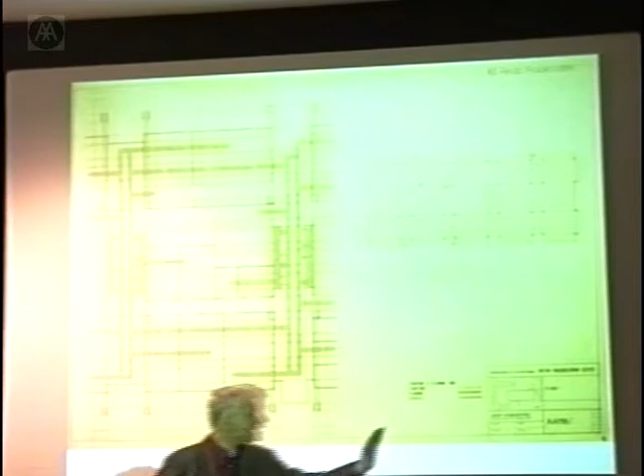And so the next building, which I haven't got any nice pictures of, was also by Arup Associates, was called the New Museums site in Cambridge. And I don't know if I can just point out slightly how it goes. It was on a grid that repeated like that. Arup Associates tended to build buildings on the grid. And so it's rather old, you see this. And so this and that is 2 grids. And then the slab spans this way about 8 or 9 metres and was made as a kind of series of T-shaped beams, so that you could get pipes across there. And this is where the laboratories were going to be.

And then there was a zone here which could contain staircases, but more importantly, it contained a duct like that, which was about 5 metres by 1 metre. And that was big enough to say all possible services can go in that duct, so we can allocate spaces and draw them as though they were there, and then simply have a schedule to say whether that particular service is there or not. And the building is, I haven't got a picture of it, and it's pretty boring, but that kind of step forward in accommodating the services seemed to me quite important.

And then there's a diagram here which shows that also in this zone you could get horizontal services running in this direction because it was a circulating space for people and they don't need much height. A couple of metres will do. And so that makes that provision. And that's a kind of history about how you get pipes into buildings.

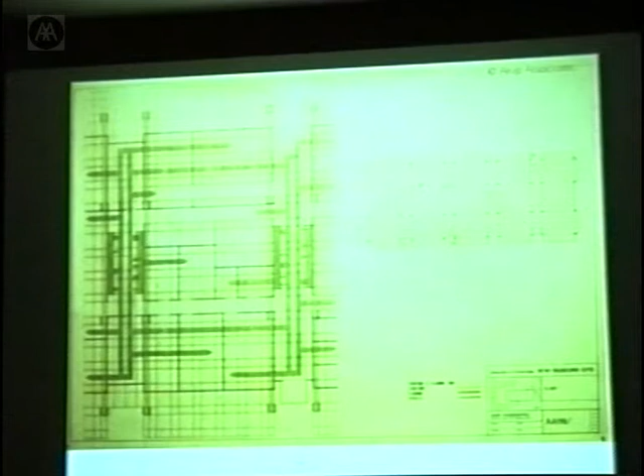There was a lot of talk at the time about tartan grids, so that you have here a pair of grids, and then a big grid, and another pair, and a big grid, and so on. And in fact, Leslie Martin did the same thing for a building in Oxford, which was some biology laboratory, which also had a tartan grid. But his idea about the tartan grid was that not just that you got pipes in it, but you got lavatories and staircases and all sorts of rubbish of that kind. So that, I think, probably deals with pipes.

Now, then I'm taking it for granted that I don't need to peddle the sustainability argument. Everybody here understands that if we go on burning all the carbon there is, the atmosphere will get poisonous. So we better not do it. And then we were all reminded of that in 1973-74, and I was asked to work on a university in Doha. Well, Doha is quite a hot place on the Arabian Gulf, like 46 centigrade is the sort of temperature you expect to get. And some people wanted to design this university so that it didn't need air conditioning. And that seemed like quite a tall order.

But there was a precedent for it, which was buildings like this, which are called towers of winds buildings. So that this is a section through a part of the building, and it's got a tower here, and air can come in down here and ventilate this space and go up again. What you can't quite see in plan is that plan there. This is where the tower is built, and there's a crossed shape division, which is what these walls represent in the middle, to subdivide the airflow. This is definitely a valid precedent, and I believed so at the time.

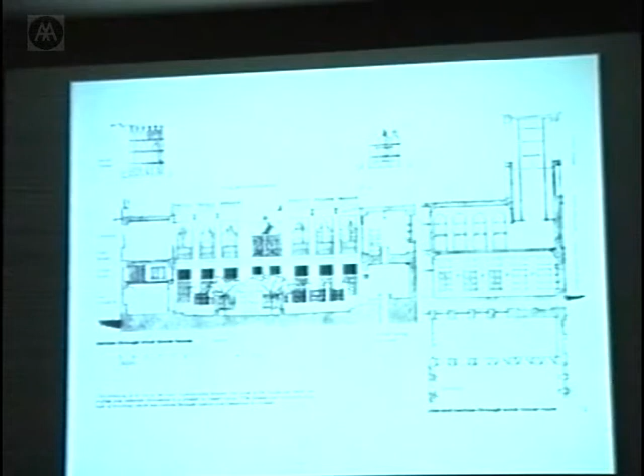And so that's a drawing of the vernacular building. Now, this is a notional experiment to explain why the shaft needs to be subdivided. And it also, I think, makes it quite important to look at the precedents, because in a way, nobody would believe that you needed to subdivide that shaft. But I've never done this.

Apparently, if you cut the bottom off a bottle and then put a candle in it in a pool of water so that air can't get in at the bottom, and you try and light it, it will go out. And the reason it goes out is because the air cannot move up the neck of the bottle and down and get any air in. If you subdivide it with a card or something down there, then the air will flow. And that explains why the Tower of Wind buildings need to have a vertical subdivision.

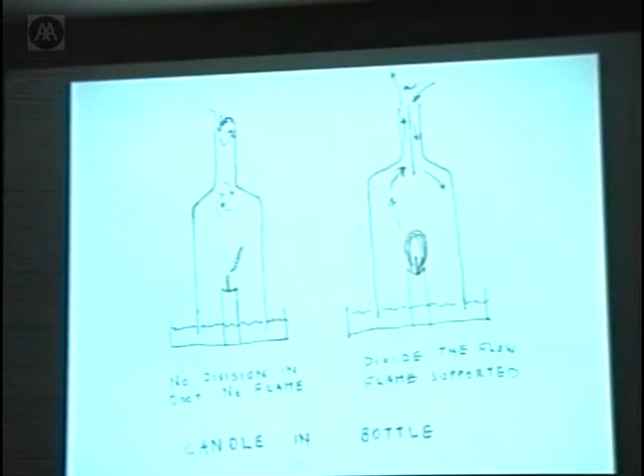And that is a piece of fluid mechanics which, it would be quite fun to set this experiment up on CFD and see what the CFD predicted, because the experimental results are quite clear and the CFD is another story. So there is a diagram which explains the idea about the ventilation of the Tower of Wind buildings.

And then I started working on this building in Doha, and I thought, okay, well, we're going to cool the building down at night, and it mustn't get too hot during the day. So then it must have enough thermal capacity so that whatever heat gets into it during the day mustn't overheat it. And so you say, okay, well, what heat is coming into it during the day?

Well, there are some people in there who are going to give off heat. It's a lecture theatre, so they're not going to have computers or anything like that. And the next thing is light. So the question is, how much light do they really need?

Well, now, there was a traditional building in Doha which is constructed of mud and reeds. So you look at a building, here it is, it's a single-story building, and it's got a sort of spandrel here which is built up off the ground. It's then got these walls supported on these mud columns, and there is this sort of shape here which filters the light coming in. So light is reflected off the ground, comes up under this ledge, and is reflected several times and hits the floor.

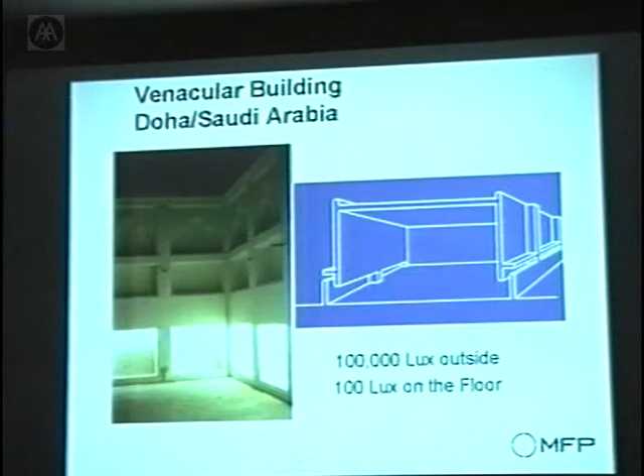But then when you go to the Cob Cottage, you've got the walls about a metre thick. The windows, of course, are much bigger, because you don't have 100,000 lux bright sunlight very often in Northern Europe. It's usually about 5,000 lux for an overcast sky. And so the windows are bigger, and I guess the light level in there is not 100 lux, but nearer 50. But it's pretty amazing that these two sets of buildings, which have been, I don't know whether you can say designed quite, but they have evolved in step with a culture.

And the people have made choices which go, if the windows are too big, then the temperature is too extreme. And if the windows are too small, you can't see. So we better find and optimize that a bit. And they optimize it and come across something which I think we have to say is about the same.

And then you look at the code of practice for educational buildings in Britain in 1947, or 48 or thereabouts, which says all buildings have to have a 2% daylight factor. Well, 2% daylight factor on an overcast day is about 100 lux. It is 100 lux. So there's another pointer at the way in which society evolves solutions.

And I think one can go on with this and look at 17th century buildings in Britain, or do I mean 18th century, my history is a bit poor, where the nouveau riche British traders, slave traders probably, got Italian craftsmen to come and build themselves some rather nice houses around the countryside in Britain. And they built quite tall rooms, rather like this one, with the windows going right up to the head of the window. Now, the explanation of that, I don't know what you think it is.

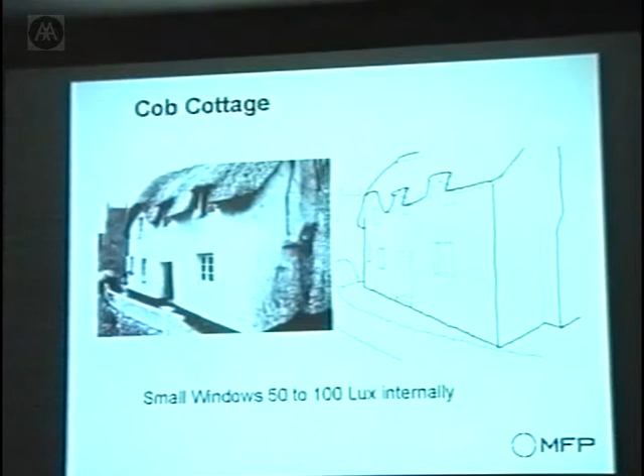Well, there's a building in Mysore, which is an 8-meter double cube with a clerestory all the way around it, with 4-meter square windows on all 4 faces. So it's 16 meters by 8 meters on plan, 8 meters high, and it's got windows with the head of the window 8 meters above the floor. The lighting inside that is absolutely wonderful, and you certainly don't need to turn any electric lights on. If you want to have low story height buildings, and you want them properly lit, then you better light them through the roofs.

I've jumped ahead. Right. So now, having got to a Cob Cottage, we then go on through the history and come to a weaver's cottage, where people were forced by economic pressures to have looms at home. And if you're going to work on a loom, you need a lot of light on the loom, so these buildings had very big windows on the first floor and are called weavers' cottages. And you can probably get 1,000 lux on an overcast day with a loom a metre away from the window. So that's a pointer towards getting high light levels for fine work.

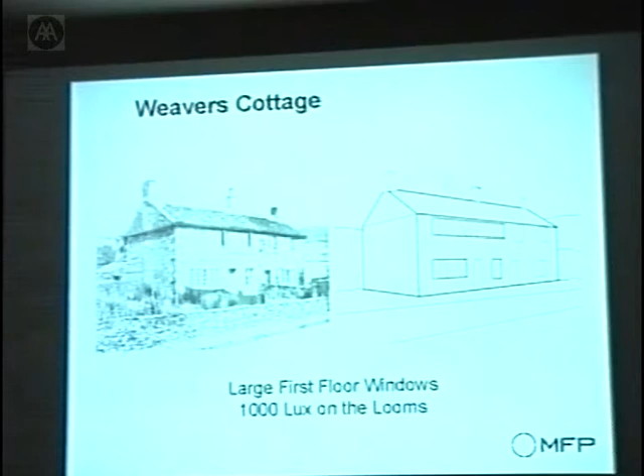Slightly difficult, I think, because if you go back to the Arabian hut with perhaps 100 lux on the floor and say, I wonder whether people made Persian carpets in these huts, I think we'd better hope the answer is no, and they made them in tents where perhaps it was brighter. So that's all about lighting, and got me to the conclusion that for Doha we would design for 100 lux.

And then you say, oh, well, if you're a lighting engineer and you put some lights up in a building, you say, how much light do these lights produce? Some number or other. Then you say, how much of that light gets onto the working plane and is useful? Well, the answer is something like a third or a half, which means if you want to light a space to 100 lux, you'd better provide 300 lumens per square metre one way or another, and that's 3 watts per square metre of heat gain, because light is about 100 lumens per watt. And that's a figure which I think we should all know and remember.

Just as 100,000 lux is bright sunlight and is 1,000 watts a square metre, a 5,000 lux sky is 50 watts a square metre, and the bright blue part of the sky is about 10,000 lux and is 100 watts per square metre. And those are quite useful numbers. So then here we are trying to design a university in Doha, and we're saying, let's have 100 lux inside.

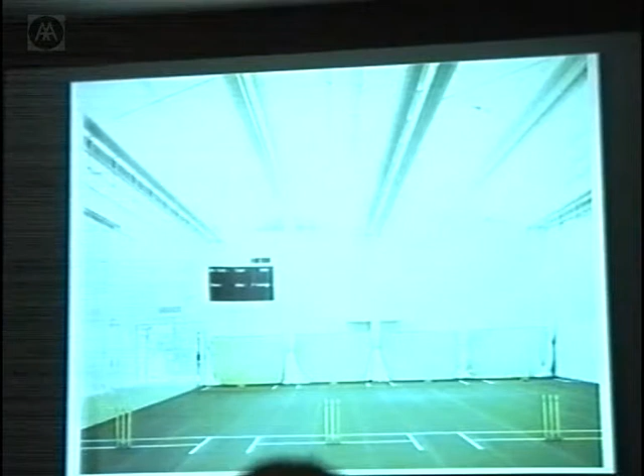So that more or less finished Doha, and it looked like that, and it's the biggest air conditioning load in Arabia, despite all of this rather pretentious justification. So now let's get going, because that introduced some of the ideas about light.

Now, I then went and did a competition with David Morley for a cricket school, the MCC Cricket School in Lords, an indoor building. And it was to replace the indoor cricket school which is there, which is a portal frame, corrugated iron box with a whole lot of lights inside it.

And the lights have to be on all the time because, after all, electric light's more reliable than natural light. And we thought, well, how are we going to get 1,000 lux on the floor in this building? And so one of the ideas was to have simply a black box. Well, that was definitely why we didn't want a black box.

So the next one was, what about a translucent skin? And of course, we knew that the competitors were likely to be in the translucent skin business because we knew who some of them were. And we thought, well, the problem about that is that someone else is going to do it. That's the main problem. So what justifications have we got for discarding it?

Well, the answer is that if you make this translucent skin able to give 1,000 lux inside on a 5,000 lux sky, it's got to have a 20% light transmission. That's perfectly straightforward and easy. But then when you've got 100,000 lux, you've got 20,000 lux inside. And that's definitely a bad thing, isn't it? And people certainly can play cricket outside.

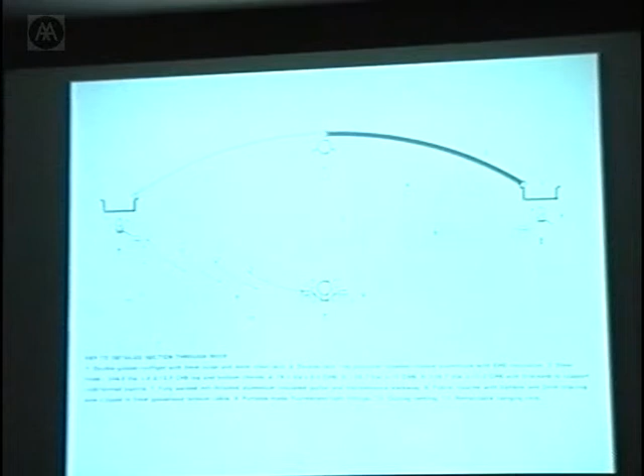Right, and you've seen a picture of the building at the beginning. So now there's some theory, because that's introduced the thing about how do you get enough light into a building. And of course 1,000 lux is quite bright. On the whole, nobody tries to design a naturally lit building to provide 1,000 lux.

And the cricket school is not heated, so it doesn't matter that there's rather a lot of glass there, losing heat. And it has very big openings so that the heat gain from the light is dissipated during the summer. And anyway, the light only gets in from the sun late in the evening and early in the morning,

because what you have to remember is at midsummer's day, the sun rises in the northeast and sets in the northwest, and you can get very badly unstuck, like the Tate Gallery at St Ives, if you forget that, which I did.

So now, there's then some theory about buildings. This is an adaptation that I've made of a thing called the LT method for designing sustainable buildings. Now, the idea of the LT method is that passive buildings are daylit buildings. Now, if you read all the literature about the LT method, it doesn't really say that unless you read it quite carefully, but it means that.

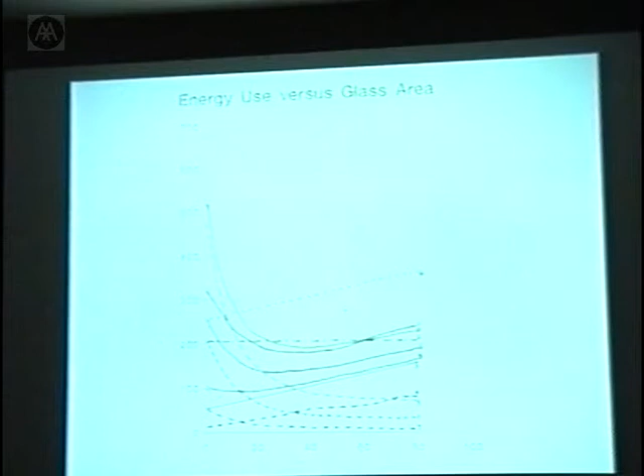So this is a thing called the LT method, and certainly when I first read it, it felt like a revelation. And I don't think many people have had that revelation, and so I put it to you that you should read it. Now, so that's enough about light now.

This is a building which was designed by Brian Ford and Alan Short and Tony Peake, and it's a brewery in Malta. Now, Brian Ford, for some curious reason, came and worked in our office for quite a long time, and we made him detail pipes in a plastic moulding factory, which I think he hated. But on the other hand, there was a bit of talk, and he went away and designed this Maltese brewery, and this shows a section through it.

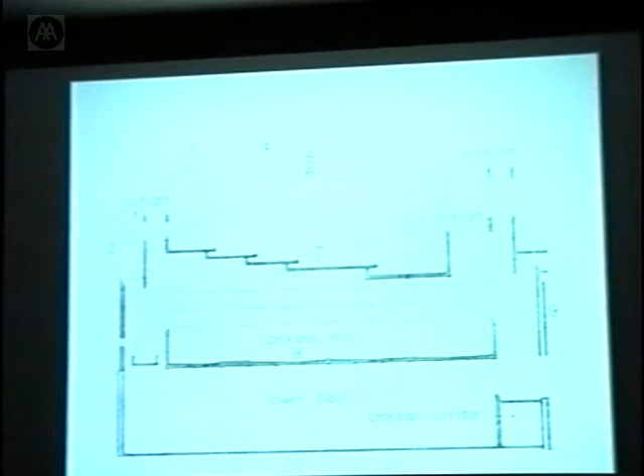You can see basically that there are some rooms. It's got double walls at the perimeter, various roof lights and ventilation openings. And the fact is that the inside temperature is about the mean of the outside temperature, which in Malta is quite comfortable. And it looks like that, which I think is a decent piece of modern architecture.

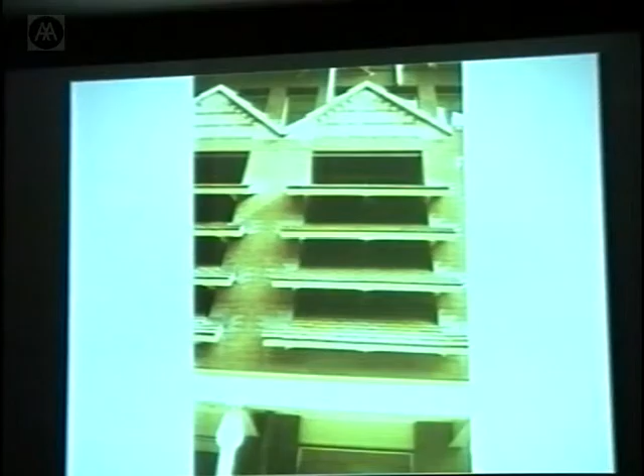Now, this is for a university where nobody talks about having air conditioning. In universities, you only have air conditioning if there are animals involved. So there's a picture of those shafts, and that's a picture of the air inlets. Working with Alan is pretty amazing because he draws very quickly and with fantastic facility. And maybe you think he sometimes draws a bit too easily.

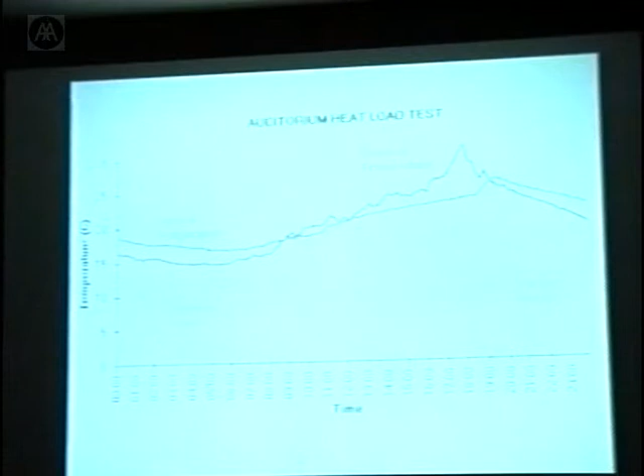And I think this peak is not the kind of thing which the design techniques predict very well. But on the whole, this sort of curve is perfectly in line with what the BRE discovered how to do in 1966. And it's in a digest which for some reason they've withdrawn from publication. So that is the Queen's Building.

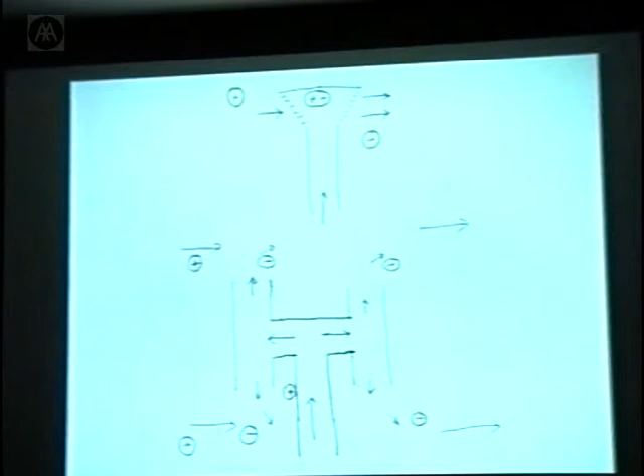Now, we were talking to Alan Short about the vents at the Queen's Building, those things. And when we were working on that, we decided it was very difficult to be sure you could keep the rain out. And so we put all these louvers in and thought that'll keep the rain out. And when you keep going, you look at it and you say, this is a diagram of what's going on. Air is coming up the shaft.

In general, the wind blows, so the wind is blowing across here. The wind blowing over something reduces the pressure, so you get a reduction of pressure because the wind's blowing over the top. But on the other hand, we put a lid on it here, and we're expecting the same velocity of airflow up here as we get coming horizontally in here, which means we're expecting more air to be going out through the leeward louver than we are expecting to come in here. And that means the pressure inside this enclosure will tend to build up. And that's not what you want.

You don't see chimneys like that very often. What you see is chimneys like this. Now this chimney, if you imagine that as all circular, the wind is coming in this direction. When it hits that chimney, it's arrested, so the pressure rises. But when it blows across these open ends, the pressure drops. And as long as there's a bit of clearance between here and here, then you still get a low pressure over this outlet at the bottom. So these chimneys seem to be much better.

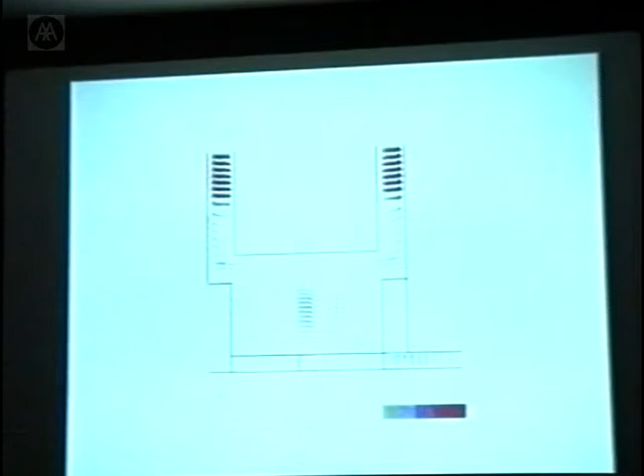Oh, look at that. Right. So now, let me just close this down. Not supposed to have done that. No. It's like that.

Technology transfer. There you are. Right. Look, there's your wonderful little thing. Great. Thanks, Max. Yeah.

While Patrick's setting up, thank you very much indeed, Max. At the end we'll have an opportunity to ask some questions and raise some points. I'm very pleased to introduce Patrick Bellew as well, founding partner of Atelier Ten, and he is going to talk about influences on an approach to environmental design, perfectly on cue. Mainly historical and animal influences, maybe some vegetable and mineral. And then he's going to talk about thermal storage techniques, talking a bit about the Earth Centre and also about the Federation Square project in Melbourne. So projects in the UK, Germany and Australia.

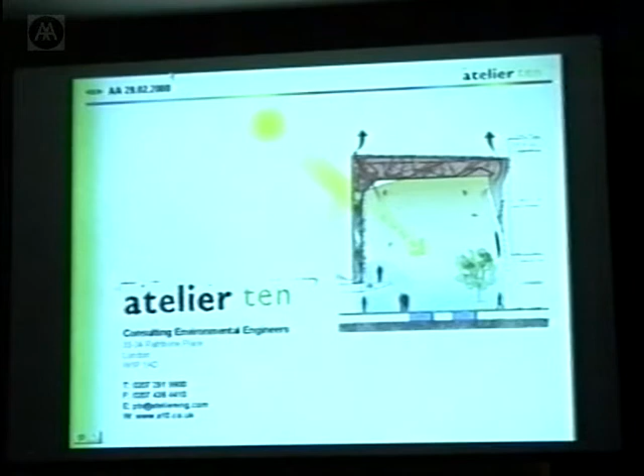You ready to go? I'm ready to go, miraculously. Thank you. Thank you. It's a very tough act to follow Max. I'm just going to try the... I wish I hadn't touched that now. Try and get both of them on at once. Just hang on a second. There we go.

I actually applied for a job at Max's practice once, and nearly went to work there. Just geographically didn't suit me at the time, and I've been a huge admirer of his work for many years. Our work has kind of veered away in slightly different directions in some ways, which I think I'm going to take you through this evening.

I came into environmental engineering quite by accident and entirely through the influence of a single individual who was Ted Happold. I put environmental engineering down as a kind of afterthought on my UCCA form in 5th place, beyond the various other courses around the country, very much not to do with engineering. And I went down to Bath, just thought it was a nice day out, get away from school and go down to Bath for the day to be told about environmental engineering.

And Ted produced a 2-hour lecture. He'd just finished doing the Beaubourg Centre in Paris, and he'd worked on the Sydney Opera House. And he produced a lecture that just stirred the soul to such a point that I came out of his lecture saying, that's what I want to do. And Max and I were talking before we came in tonight about what it is that makes people environmental engineers. And the answer is we don't really know. It seems people get into it more or less by accident, or frequently family or other connections.

It's not the kind of career you get into when you're filling in your UCCA form, that's for certain. And that's witnessed by the fact that many of the engineering schools around the country are closing down due to lack of interest. Single figure entry. One person joined the course at Reading this year, so they shut the course down. It's a very difficult area to recruit into. And so there are many architecture graduates coming out of university, all of whom want the support of good environmental engineers, but actually our system is not supplying environmental engineers anything like the numbers that we need to answer all of your needs in the future.

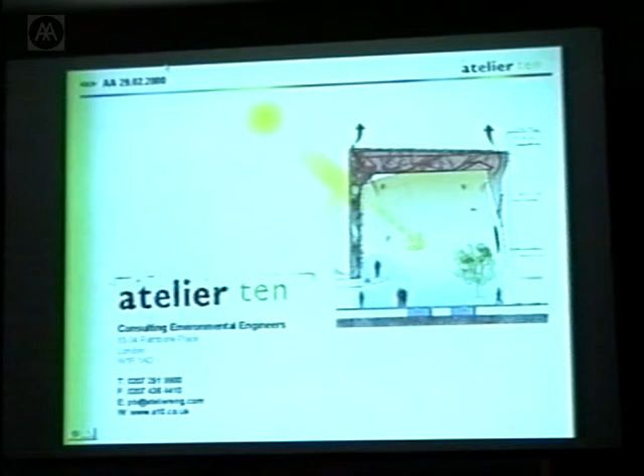Buildings consume 50% of the energy used on the planet, and you're responsible for designing those buildings. How are we going to achieve a 10% reduction in CO2 over the next few years unless our buildings make huge inroads into that? And it's not factor 2 or factor 3. It really is this thing about factor 4. You've got to be doing things a multiplier of times better to make your buildings have any impact on this kind of problem. You often feel in doing what we do, and I'm sure Max feels the same, like you're tilting at windmills.

Everything that we do is a tiny part of this huge problem, but it is nonetheless a vital part of it, and it's a part that architects have an enormous role to play. And I don't see myself as a kind of tree-hugging environmentalist in any way at all. I've never really been into that sort of movement, but what one is starting to realise is that there's an acceleration of change that is witnessed.

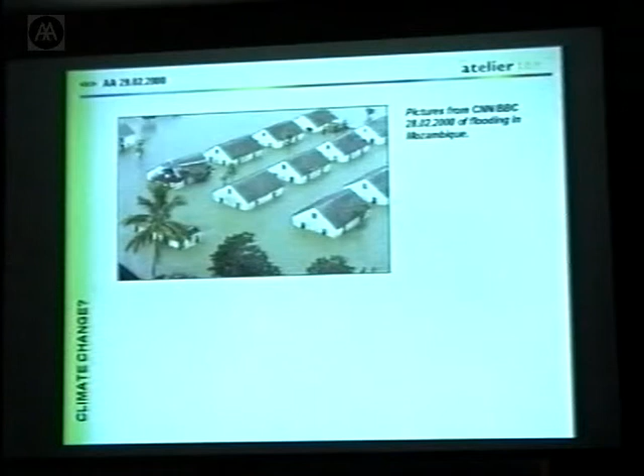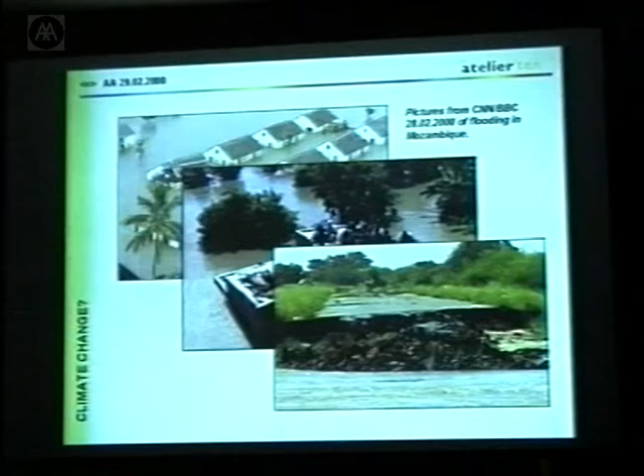This is off CNN yesterday, the floods in Mozambique. Now that's not just happening by accident. This is global warming, and this is climate change that's happening. And it's changing in Mozambique, it's changing in the USA, where you've got very big, very mature trees that have never seen a tornado that big before come through and hit them. And those are signs of global change.

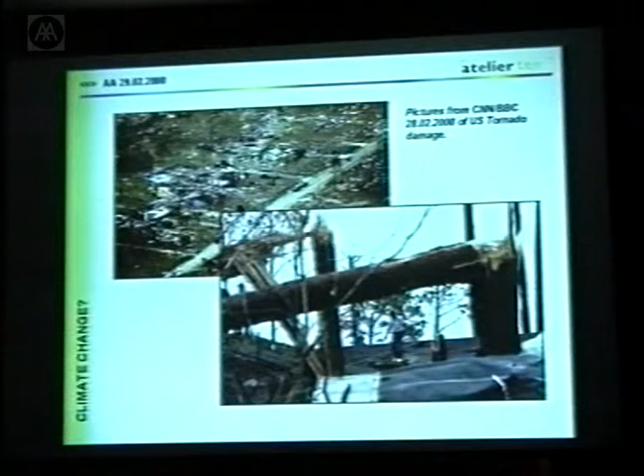Also, another change, which I think is equally important, is biochange. Things that we are doing to the planet at the moment are causing fundamental breakdowns in biosystems, and it's particularly acute at the North and South Pole. The polar bear cub population is reducing in numbers simply because the pack ice isn't around for long enough anymore for the adult bears to kill enough baby seals to feed their young on, so the young aren't surviving in such great numbers, so the population is dwindling.

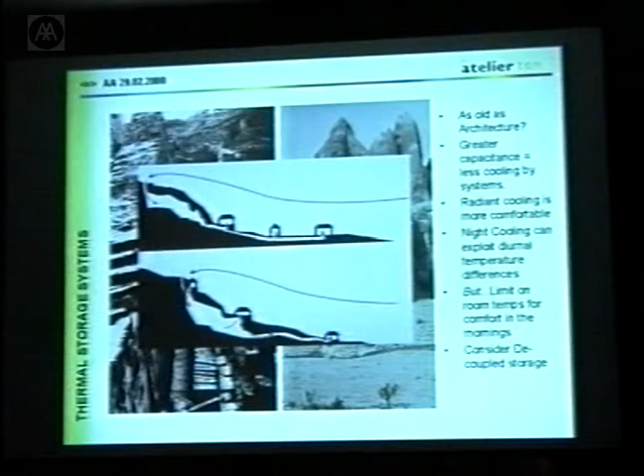I'm going to talk quite a lot about thermal storage. And Max has already touched upon a lot of the issues. Thermal storage is an intuitive thing, as old as architecture. On the right, troglodyte caves, people taking shelter, looking for this attenuation of the daily swings from day to night in temperature. And on the left, remains of a Roman hypocaust, which was used as part of an underfloor heating system. Diagram from the Villa Costozza in Italy, where a cave system is used as part of an underfloor ventilation system in houses, so a prevailing wind pushes down through the caves and provides passive cooling.

And the indigenous architecture of the Arabic world, which is very much where one gains inspiration from, particularly looking at thermal storage, where the main idea is to attenuate and store heat gains from day to night to try and make the days less hot and the nights less cold. And that's a key part of the kind of environmental models that I'm going to show you a bit later on.

So night cooling is a big issue, but in our climate you have to limit how much you night cool, because you get a problem. You can overcool buildings. What you don't want to have to do is put the heating on a summer morning, having had a very cold night, because everyone comes into the office and it's 15 degrees and it's freezing, so you've got to switch the heating on. Clearly, one has to find a way of dealing with those sorts of things.

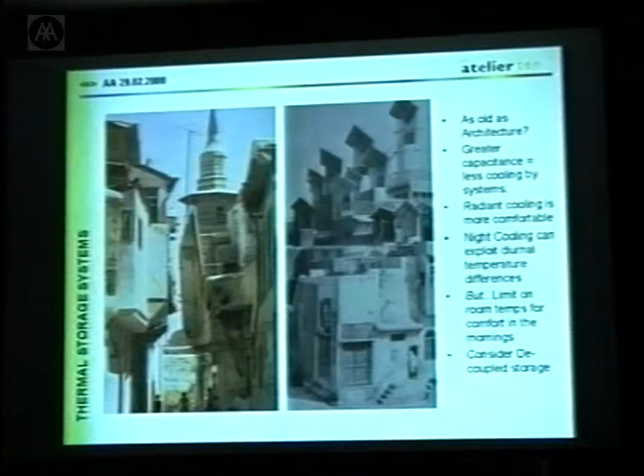And a particular area that I've been working on in the last couple of years is what we call decoupled storage. Sounds terribly dull, but it's basically taking the storage out of the room and putting it somewhere else. And I'll show you what we've been doing at the Earth Centre and Federation Square on those subjects. And thermal storage can also be part of great architecture. Corbusier was a great exponent of environmental design in many of his projects.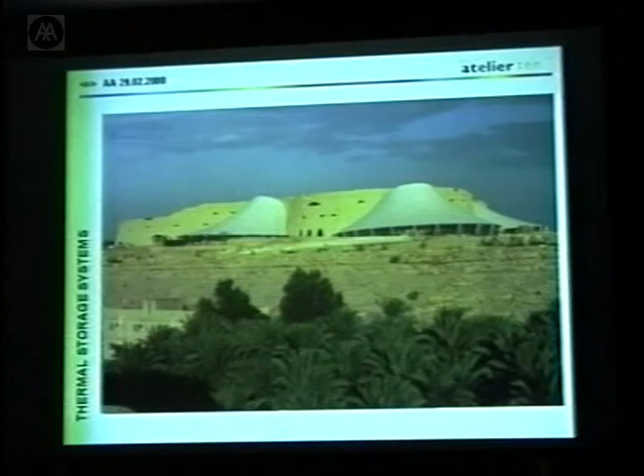And this is my first project with Ted Happold and Frei Otto when I left university, which is a diplomatic club in Riyadh, which was very much a redefining building in Riyadh. It was a very mechanical building. It didn't have Max's passive wind stack ventilation systems, but it had big thermal mass, small windows, lots of solidity to it that made it a very successful and low energy building.

I always sort of kid a bit about where environmental engineers find their inspiration. There's a few from indigenous architecture. As architects, you perhaps can look to your peers and to history for your architectural influences, whether it's Corbusier or Louis Kahn for his excellent hiding of ducts and pipes, and those sorts of people. But there's a massive body of work in architecture that can give you many clues. In environmental engineering, it's not quite so easy.

This microphone stand always catches the light.

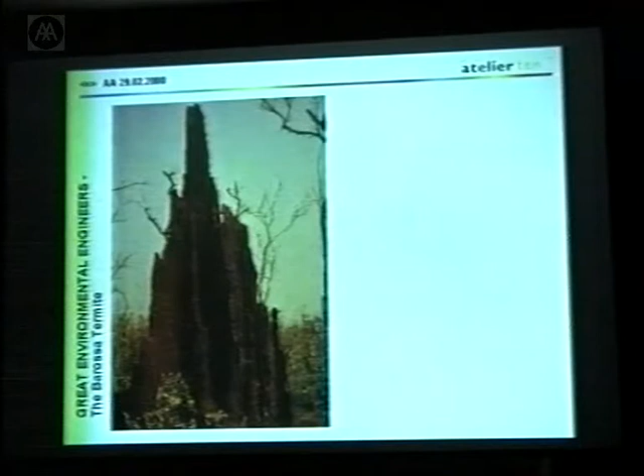This is the nest of the Barossa termite in Africa, which, if you watch Life on Earth, was the nest that David Attenborough and his film crew were climbing around inside when he was presenting a program about environmental control. And the Barossa termite nest is structured entirely around one motivation, which is to keep the queen, who lives in the middle, at 30 to 31 degrees C all the year round, because that's the temperature she likes to be at, and she's the boss.

Certain of the animals have a job in their life, which is to be like a volume control damper. They block and unblock these large holes inside the nest in response to temperature stimuli from the centre. We're not quite sure how that works. It's biochemical in some way, but the signal goes out and says we're too hot or too cold. So if it's too hot, they unblock the holes. The stack effect increases. The wind going across the top might help to drag some more air out of the nest, and air is brought down into a cool cellar that's down underground.

Now, in periods of severe drought, the animals have been observed to all come back. They stop going out searching for food, and they come back to the nest, and they go up and down to the water table, carrying little leaves or bits of leaf with water on, to increase the evaporative cooling effect inside the nest to maintain the temperature. As the temperature drops, they block the holes up, and at night the holes are almost completely blocked, so that the heat from the day is retained inside the nest.

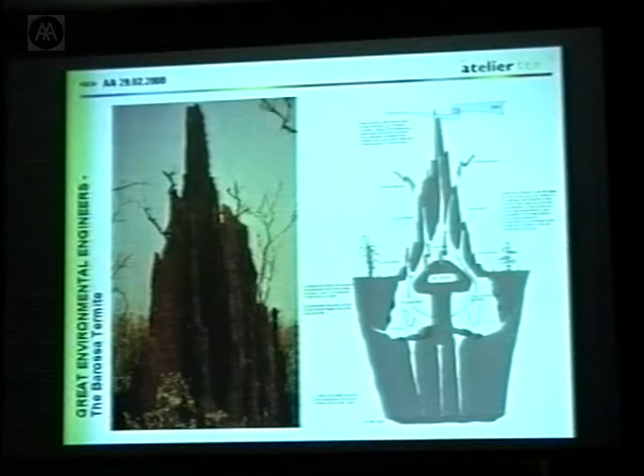They also have a central heating system, which is incredibly complex and relates to the growth of mushrooms on beds of chewed wood. Certain of the ants have a job which is to secrete an enzyme which stops the mushrooms from germinating during the daytime. So at night, when it starts to get cold, they stop secreting the enzymes, the mushrooms germinate, and as mushrooms germinate, they release heat, and therefore provide the central heating for the system inside the nest. Now there's lots of ideas in there about thermal storage, about evaporative cooling, about passive stack ventilation.

That's the queen there, and these are the workers helping her, and she produces many thousands of young per day, I gather, to sustain the large population inside the nest. But there are so many influences there for the environmental engineer that it's kind of irresistible. But what's most important about it, I think, is that it's intuitive. And good environmental design almost always starts with intuition. Something that looks like it works, I say it again, will often work. There are lots of things that you have to test, but you have to look at it and see if it looks right.

And so Max's diagrams of buildings that are made entirely out of glass, you've got the graphs that show that buildings that are made entirely out of glass probably aren't energy efficient. You look at them and you think, well, can it really be that a 4-metre high north-facing glass wall, no matter how many layers of glass and how many clever blinds it's got in it, can it really be energy efficient? Is that actually a sensible way of doing things?

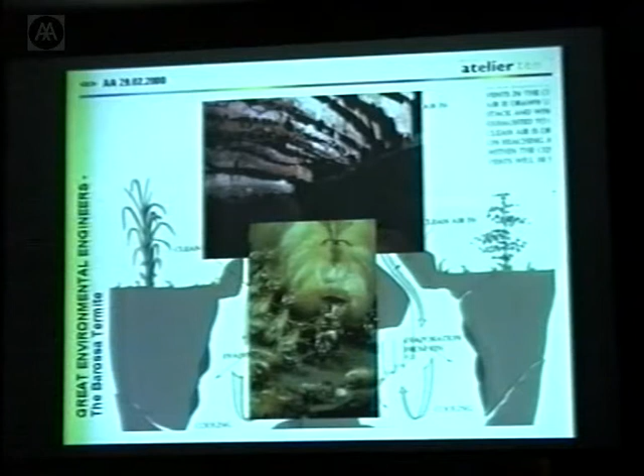And besides which, in a modern office, how are you going to see your computer, say in the new Lord Mayor's office? How is anybody actually going to see a computer with glass on all 4 sides in this new sustainable building? I just posed that as a question that I wasn't going to answer.

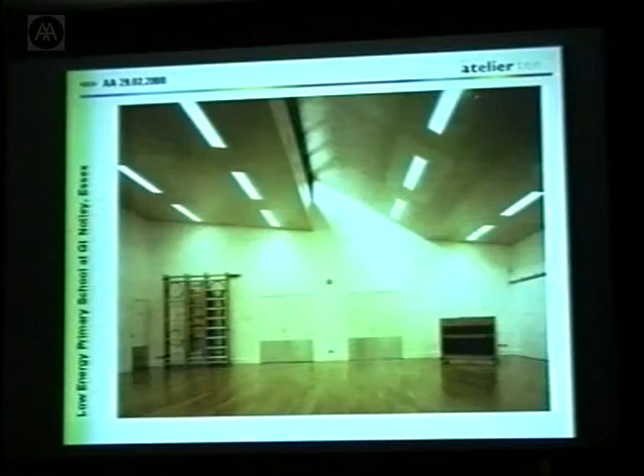So a very simple classroom diagram that grew very much out of the work in the 60s and 70s on classrooms and produced a building that actually has no thermal storage in it. It's a very, very lightweight building. And the other point I wanted to make with this is that it's not always appropriate with buildings to make them very heavyweight. A school building is actually only in use for 9% of the working life of the building. That's the number of hours of the year that most classrooms are in use. And so it doesn't make a lot of sense to have very massive storage systems.

It actually makes sense to make things fairly light, fairly responsive, but the things that deal with the daylighting and the heat gain and the ventilation issues in just a very simple way. And the results, in some ways, might be perceived as slightly odd. This roof here, it looks kind of quirky, but it's actually all about the daylight diagram, and it's been very interesting developing up that model with the architects and watching how the input of the environmental engineer has fundamentally altered the way that the building is perceived.

I don't think AHMM, who were the architects, really felt it was going to turn out this way when they started designing it. The grass roof is intended as part of the CO2 balance for the school. The walls are 300 mil thick of recycled insulation, breathing wall construction. There were going to be photovoltaics and wind towers and all sorts of wind generators and things on this school as part of the sustainability argument for renewables.

But actually what it was felt to be was an on-cost, on a DFE cost target model for building buildings of this type, and we could actually replicate this around the country as a very low energy building without having to put all those things on it, and so it's kind of affordable as a transfer around the country.

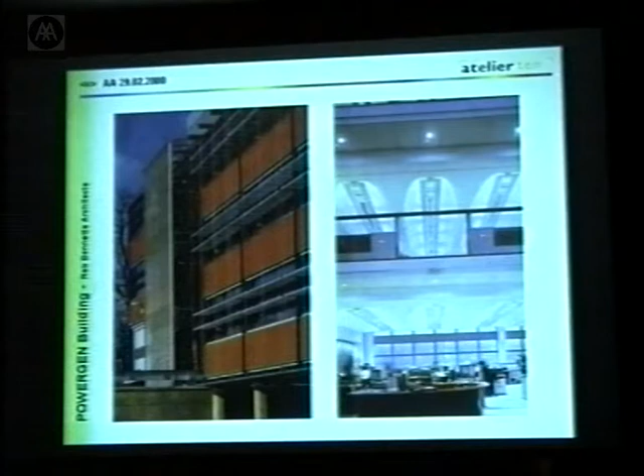This high-level window here, which comes in across here, is all about night cooling. It's about letting air run across the slab at night to get this daily cooling, nighttime cooling, for the following day. I'm going to zip through these, but they show you some of the principles.

Just off this slide here is the Queen's Building, which Max did, and we followed on after the Queen's Building with Eva Jiricna Architects, looking at their new library, the Kimberlin Library, an extension to a rather ugly 60s block that was stuck here. And the university's brief to us initially was that as a university we're very into natural ventilation. We believe very strongly in natural ventilation.

And we took the brief and we talked with them about the usage of the building. And what they said they were going to do was to put 1 student per 4 square metres with a computer, from potentially 6 or 7 in the morning until 10 o'clock at night, all through the year. So we looked at the natural ventilation model, particularly the winter model, because when they say all through the year, they don't really mean the summer holidays, July and August. So the big issue is about the winter heating when the library is busiest.

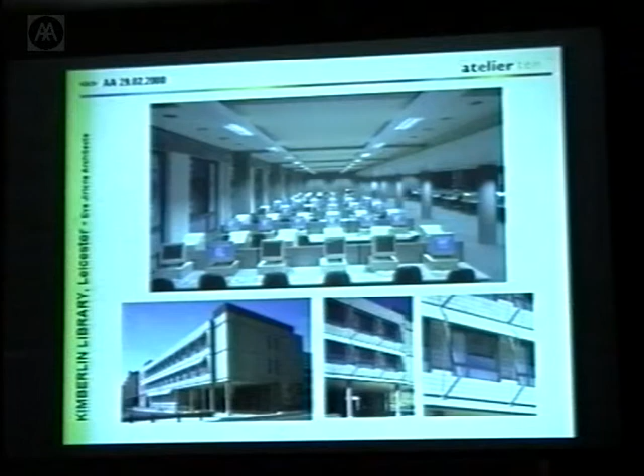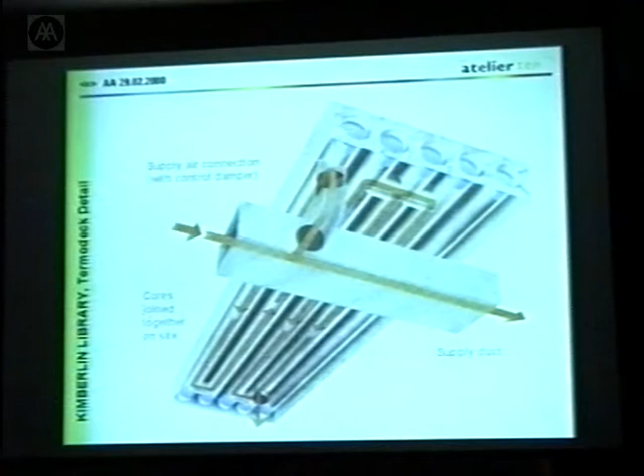Now, the difference between that and a flat slab or even a slightly profiled slab is that when you look at cooling a flat surface, in an average day you're only going to impact on maybe the outside 25, 30, 35 mil as your heat sink as the heat moves in and out of the concrete. What the Termodeck does is it actually opens up that 25 or 35 mil all around all those holes in the cores as a potential storage point for heat or cooling.

So in the wintertime, you can use it as a stabiliser, as a capacitor to store the heat gain from when the students and the computers are there to when they're not, or when they're there less, so you avoid this daily swing in temperature.

And in the summertime, you can cool that slab down at night to maybe 19 degrees, so that it acts as a cool surface over your head, but then acts as a cool conduit for air to come through the following day. And the storage capacity of that is somewhere around 60 watts a square metre of cooling load. Now, if you add people, computers and light together, we get to around 60 watts a square metre.

If you let too much sunlight in, you can't deal with the perimeter loadings, so you have to keep the sunlight out, or certainly the summertime sunlight out, although you can let daylight in. And you also have to try and deal with the fresh air load in some other way, and we do that with an evaporative cooling system on the air plant, which I'll come on to in a minute.

And Max showed us a graph of the other thing. I'll show you that in a second. This is pretty much the same warm day in Leicester, about 31 degrees, and that's the outside temperature going up and down. The blue line is the air going into the hollow core on the Termodeck. The green line is the air coming out of the hollow core on the Termodeck, and the red line is the space temperature inside, even with all those people and the computers inside.

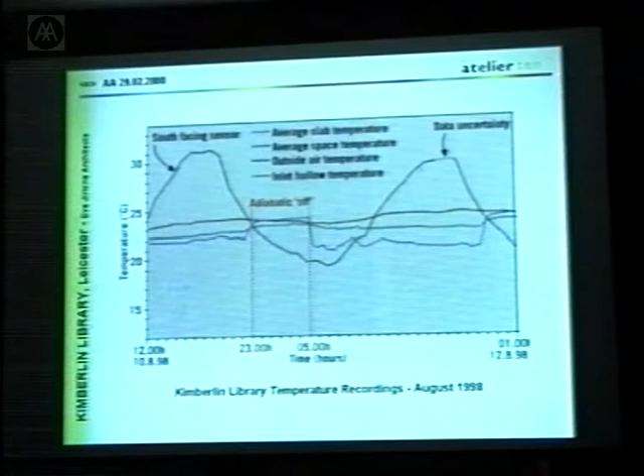The other thing about this is that because of the heat recovery on the plant, they switched the heating off from the building last year completely, and it didn't actually affect the temperature inside at all. It's so densely used that the recycled energy from the computers and the students means that they don't actually have any heating on. But what you are paying for is the energy for the fans, because you're having to drive the air through the system and through the planks. So you have an energy cost in running the fans, but you're left with virtually no heating energy cost at all.

And we're just finishing a building in Winchester which uses the same system. It's with Feilden Clegg. It's a little college building for King Alfred's College, about 1,100 square metres. The diagram here is slightly different to the De Montfort in that it's got a single loaded duct. It's got duct down one side, and then the Termodeck planks go across this way.

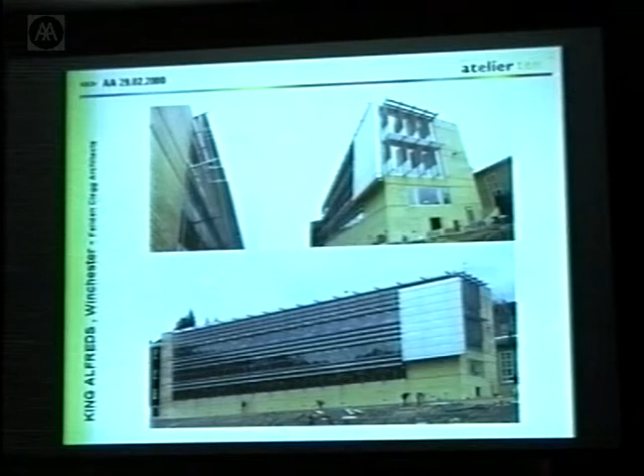But I put it in because it is actually quite heavily glazed on the south side. You can see here there's a lot of glass, but we've worked pretty hard with them on the shading so that we keep the peak solar gains out. There's also an internal blind to deal with the glare because it's a very highly computerized environment. But we've kept the solar gain pretty much out, and the thermal system works as the Leicester scheme.

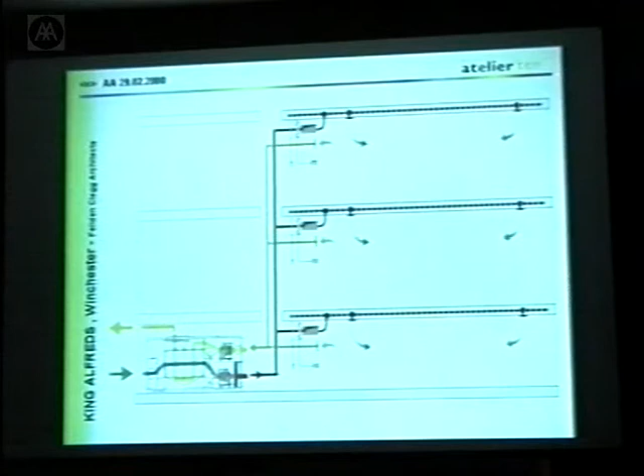Now I'm going to do something very brave here and show a piece of plant at the AA, which is not something that happens very often. This is the diagram of how it works. There's a blower unit here with a cooling system. I talked earlier about the evaporative cooling. This is the sort of high technology, high efficiency plant unit that we're using, which, although it's not natural ventilation, it's a mechanical system, it's a high efficiency mechanical system. It uses very little energy.

So we have very high efficiency fans sitting here and here, extracting the air here, supplying here. And what happens is, to get the extra cooling effect in the summertime, we pull the air out of the building, and it passes this way and passes twice through a heat recovery plate, a box of plates, effectively.

So the air goes round that way. The fresh air, meanwhile, comes in this way and goes through the other side of the plate. So the air doesn't actually touch. They're on counter two sides of a plate. And we spray cold mains water over the air that's going out of the building, and that cools the air.

So the air's coming out of here at about 22, 23 degrees. And we push it through here, and we spray water at 10 degrees over it, cool it down to about 16 or 15 degrees as it goes through that first set of plates. So then the air that's coming in, even if it's 28 outside, is being pre-cooled as it passes through here and comes off at a temperature of around 21 degrees, which then means it doesn't impose any additional cooling load

on the thermodeck planks. So we've dealt with the solar load, we've dealt with the air load, and the thermodeck planks are dealing with the load from the people and the lights and the equipment. And so we've therefore got a system that's pretty much in equilibrium in the summer, although we are paying to run the fans.

What we do then is we apply what we call this factor 4 thinking to the way the ducts are designed and the way the pipes are designed, which is to say that if you increase the size of a duct by something like 10%, you reduce the energy that's required to drive the air through it by perhaps 30%. And so if you actually slightly oversize all the ductwork, you can then reduce your energy consumption by 30, 40, 50%. So these fans are sized on about half of the kilowatts per meter cube that a normal fan system is.

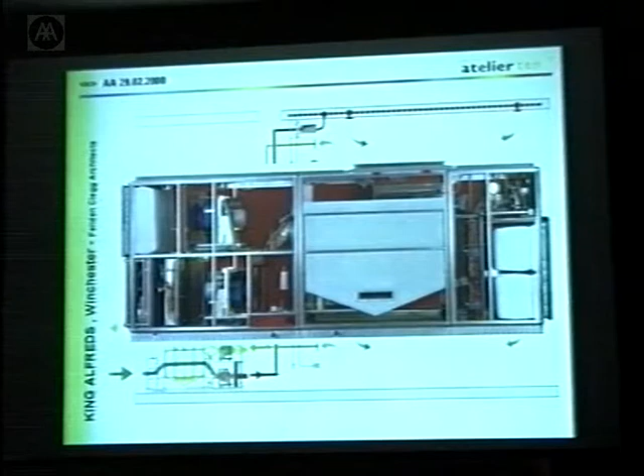What's amazing about this is that is the boiler for the whole building. And that boiler comes on for about 3 hours a day in very cold weather and not at all the rest of the time. They've been watching it. We ran the system up first in December, and they've been observing it every day on the BMS, and it literally is running 3 hours a day, and it's about a 40 kilowatt boiler doing a 1,000 square meter building. So it's a fairly significantly low energy building.

But what you are paying for is blowing the air through that unit. So it's not zero energy; it's just very low energy. Before I leave entirely off the thermal storage, I wanted to talk about a project we've just finished also in Germany. This is some low energy, very very low energy housing in Hanover. This is the first design studies that were done for it.

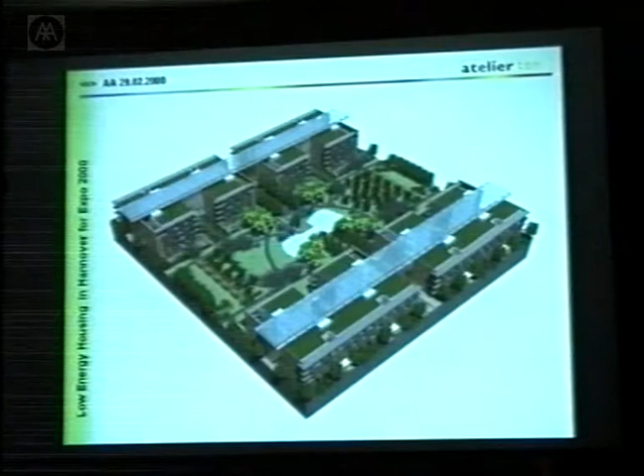One of the reasons that people don't build very low energy buildings over here is because there's a difference. The people who procure buildings, if you look aside from universities and places like that, mainly don't pay the bills to run them. Whether you're Berkeley Homes or Stanhope Properties, you don't normally pay the bills. The guy who moves into the building pays the bills. And so that means that there's no real inspiration for anybody who's building buildings to do anything other than comply with the regulations unless they have some unique marketing proposition.

So that's why most of the buildings that Max and I and people have done that are low energy buildings tend to be either university buildings or buildings where the owners are going to run them. And you don't find a lot of movement in the speculative market towards this sort of thing. What they've done in Hanover, this is a site on the edge of the Expo, which is the Environmental Expo in Kronsberg, just outside Hanover, is they have regulated the hell out of the schemes.

The normal house in Germany will consume about 120 kilowatt hours a square metre a year. We've had to demonstrate that our housing scheme will not use more than 50. And when I say demonstrate, we've had guys, I don't know if Jochen's here, the guy's been doing all the analysis work, but they've come back with questions over 1 centimetre disparity in the sizes of windows that we put in our models and this sort of thing. I mean, they really have checked it to death. So we've had to prove we've achieved only 50 kilowatt hours a square metre a year.

The conventional model for low energy housing would be, this is south down here, a north-south facing array of buildings, because generally it's felt that south-facing flats produce the most energy efficient solutions.

We actually turned that around a little bit, and we've said that if a block of flats is on the east or the west, it still gets sunlight for part of a day. And if it then shares a common space between the next block of flats with some kind of what's become known as the microclimate zone in between, then maybe we can find a more energy efficient model. So the heat loss is only through these outer faces, not through the inner faces, because the microclimate zone is more self-regulating.

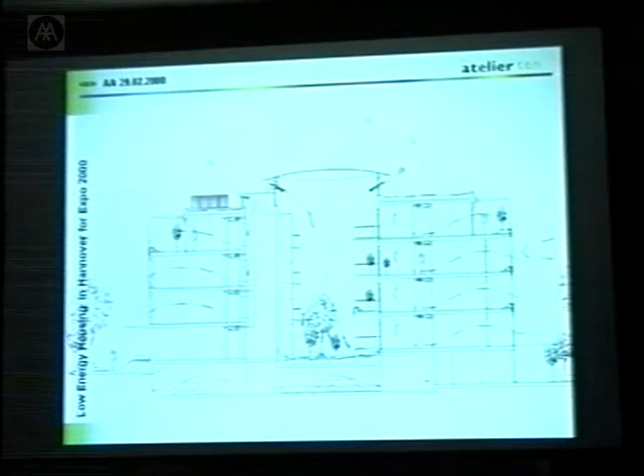Each of the apartments has then got... I've just hit a button.

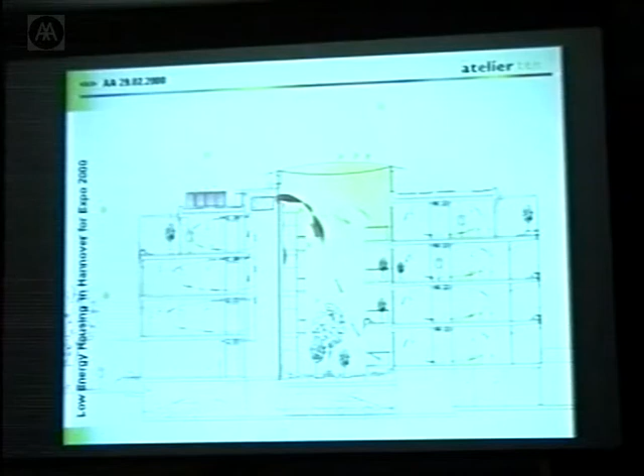It's mechanically ventilated, because in terms of the regulations, we couldn't have living spaces opening out into the microclimate zone without having some other source of fresh air. So they're all mechanically ventilated, with a high efficiency heat recovery, which runs in the winter, and again low specific air volumes.

And what's the result of it? It's now nearing completion. There's the Hostaflon roof flying over the top, 300 millimetre thick insulation on the outside of the walls. But we've managed to achieve quite a high level of glazing on both the east and west sides to get good daylight into the apartments. It can be filtered in the summer. The blades on these haven't yet been set up, but it'll be filtered in the summer, so you can push a shutter across in front of the windows in the summer to keep the direct gain out, but you can push it across an opaque area in the winter so that you allow solar gain into the apartment in the winter.

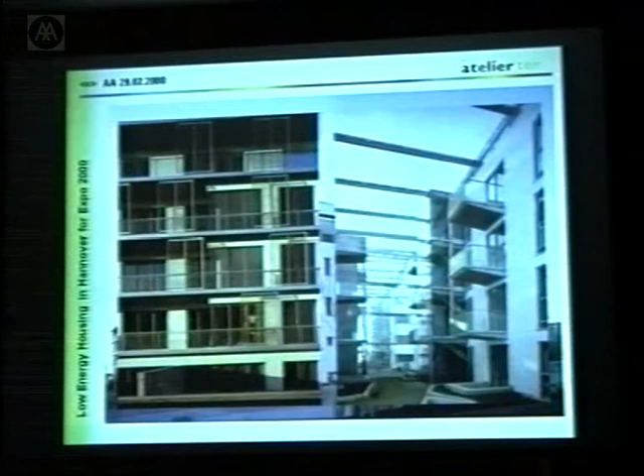Now, just as a quick comparison, in the UK, I guess housing might be around 120 kilowatt hours a square metre a year as well. A typical house would consume something like that for heating and what have you. These are 50, but it gets down to minus 15 in Hanover for about 2 to 3 months of the year. So it's a hell of a lot colder out there than it is here. It's been monitored and tested, and so far it's performing very well.

Now I don't know how much I'm doing for time.

I'm just going to take you through now this idea of labyrinths, of decoupled thermal stores. And the first project I'm going to talk you through is the Earth Centre in Doncaster, which is a Millennium project designed by Feilden Clegg architects. And the building I'm going to talk about mainly is the Arrivals Building Gallery, the Planet Earth Gallery. This thing over the top here is a photovoltaic array of 500 square metres of PV, which is currently being built. It wasn't built in time for the first summer of trading.

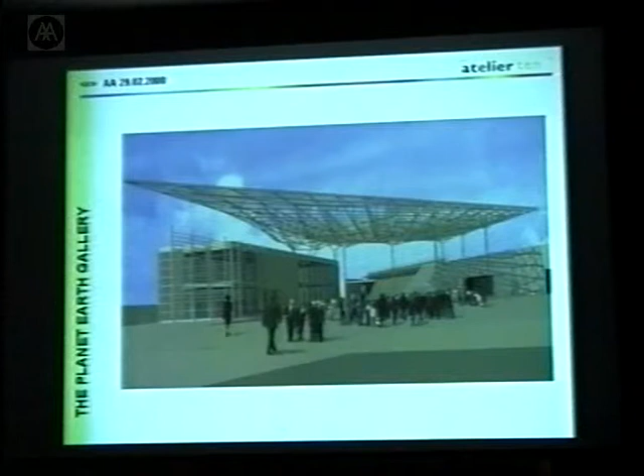And here is also a little cafe building, which I'm not going to talk about. There are lots of other interesting buildings on the site. There's a building by Will Alsop, which houses a living machine, which is a biological sewage treatment plant. But I'm going to specifically talk about the Earth Centre. The building's brief was to become a national centre for education and enlightenment in the field of sustainable development. So it was entirely appropriate that we should come up with a low energy solution.

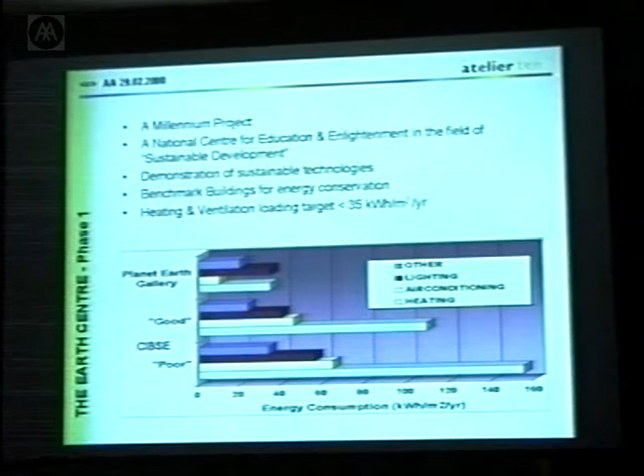So here again, we're not talking about clients who are looking for building regs type solutions. We're looking for benchmark buildings and very, very low energy targets. Now, this graph shows typical buildings. A poor gallery building in the UK might use that much energy for heating, that much for cooling, and lighting and other. What our target was to get down to something like that for heating and something like that for cooling, which would just be the fan energy, to try and eliminate air conditioning altogether.

There are still criteria that you have to meet. As Max said, you've still got to produce comfortable environments. We can't be responsible for producing environments that are fundamentally uncomfortable to be in. So criteria number 1 is that the comfort and air quality has to be maintained.

But the first designs that came up, the site is an old colliery spoil heap on the edge of Doncaster, and it straddles a fault. And so the structural engineers, who were Atelier 1, had something like a 1.2 metre thick raft that was going right across the site. And in our first discussions, we thought, well, what we really want to do is to get the air in at floor level, because displacement ventilation seems like the right way to get the air in.

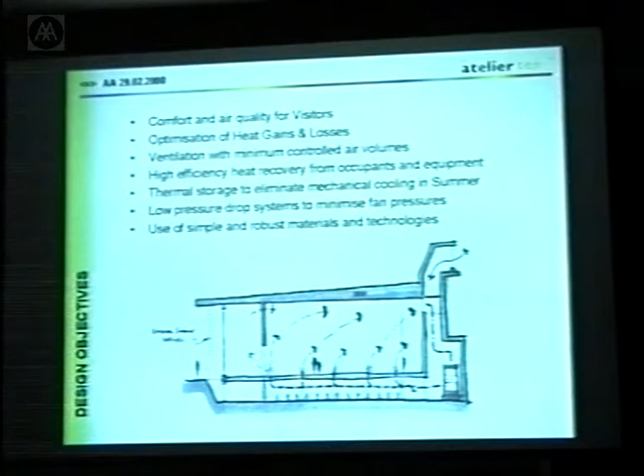And so we started to talk to them about, can we hollow out this floor and make it a composite slab? So we've got two, top slab, bottom slab, linked together by concrete walls. So this was the first sort of doodle that I sent to Peter Clegg. And we started to think, well, how can we maximise the surface area under this floor? Should we start putting in walls?

This was an idea: we might use traffic cones, because they were looking to use a lot of local labour. Could we take traffic cones, fill them with rammed earth, and then spread them out across the floor to increase the surface area so that we maximise the thermal capacitance of the structures? But the honeycomb composite slab suited the structural engineers, and so we started to develop this idea of a labyrinth. And an important intrinsic part of that is the idea of displacement ventilation.

And I'll just bore you with this for a minute, because it is quite important when you're looking at low energy solutions. A conventional air conditioning system blows the air in from the ceiling. Witness one ceiling diffuser. What that does is it takes all of our contaminants and our wasted air and our heat, and it mixes it back up in the room. And so that air has to come in very cold in order for you to feel comfortable at the level you're sitting at. It has to come in maybe at 12 degrees to achieve comfort at something like 21.

The idea with displacement ventilation is you put the air in at the floor level at maybe just a couple of degrees less than the environment that you're serving. So it's at 18 or 19 degrees if you want to try and achieve 20 degrees. And so then a temperature gradient works with the heat of the room, and at the highest point of the room, it's very warm. And you can extract it away, but you can get comfort quite easily at this level.

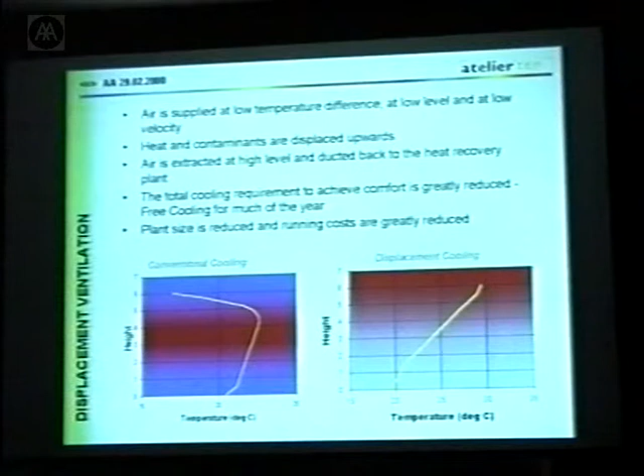Now why that's important is because with the English climate, the outside air temperature is warmer than 12 quite a lot, but warmer than 19 for many hundreds of hours less per year. So what you get is free cooling for up to an extra 700 or 800 hours a year when you can push outside air straight into the space without having to pre-cool it. So displacement ventilation in many applications, as long as the ceiling heights are high, and I should say these galleries were 6 metres high, provides you a very good way of getting low energy air supply.

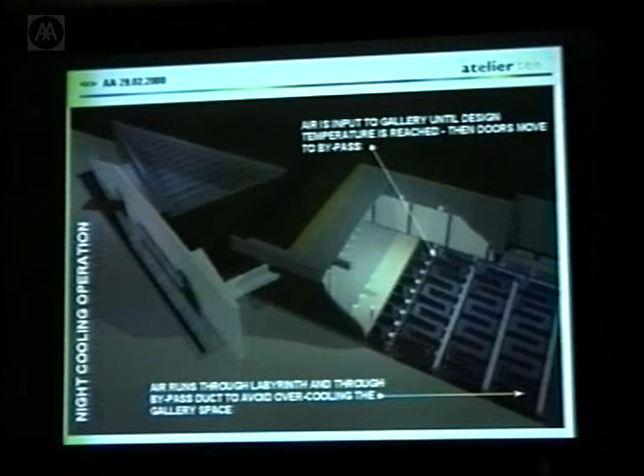So as the design developed into these underground labyrinths, this shows what happens at night. We've got a high efficiency plant, very similar to the machine I showed you earlier, sitting up here, and it pushes air into this undercroft, and it runs along this long duct, but it runs at about half a metre a second, so it's really slow, very, very low energy consumption fans. It goes backwards and forwards through these cells, and it cools them down. And we do put it into the room at night, where we cool the room down at first.

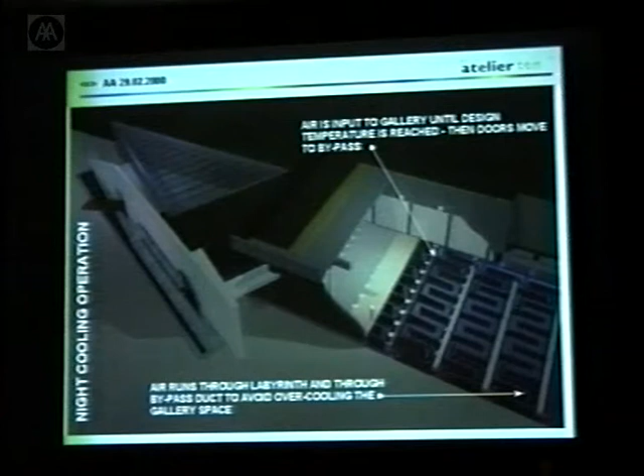First off, we cool it down to the temperature it wants to be at, and then we stop. We shut the room supply off by just shutting some dampers, and the air is then taken away and thrown back out to outside. So we can actually keep the labyrinth cooler than we can keep the room. So by decoupling the thermal storage from the space, we can keep it cooler.

It's also true to say that in a very large volume space, it doesn't matter how massive you make the walls, because an individual standing here, this is 20 metres front to back, is such a long way from the surface, it doesn't really matter how massive the surface is, it's not going to feel like a massive space, it feels like a lightweight space.

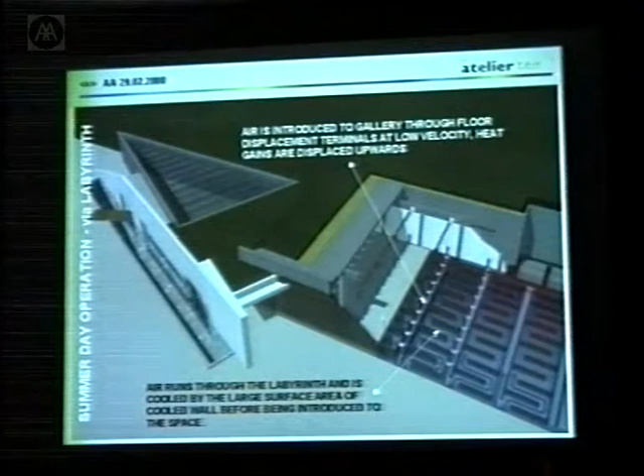And so that's the idea of the labyrinth, is that we cool at night, and then the following day, we can then push warmer outside air through the brick walls. It cools down as it comes through, and then it gets run back up this duct and is delivered through diffusers in the floor and spreads out across the floor where it absorbs the heat gain from the occupants.

When the load is satisfied, or at the winter time, we can then open a little damper and a door here, which that damper shuts, that one opens, and the air runs straight down to the spaces. And then the energy comes back in the winter at high level, back through here, back into the plant, where we recover all the heat from the lights and the exhibitions and the people, if there were any people. There's a bit of a problem for the Earth Centre. I'll say more on that in a second. But so we're recovering all of the energy that we can to use it as part of the system.

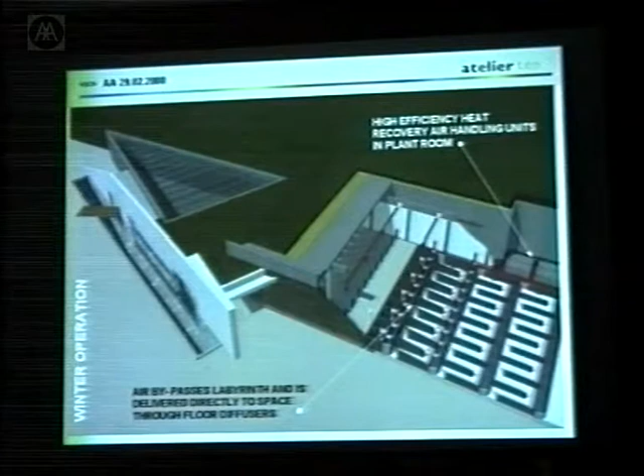Now, the Earth Centre has suffered from millenniumitis in that it was, I think, underfunded. The project needed about 100 million to give it a critical mass to make people go for the day. And they spent about 50 million, of which 25 to 30 went on regenerating the old coal spoil heap and landscaping the gardens. Future Systems' big Ark building hasn't yet been commissioned or built.

And so the centre hasn't got a critical mass that encourages the number of visitors that ought to go, because it is a very exciting and interesting half-day out. But it's a long way to go for a half-day out. It would have been a very, very good day out. And I just hope that one day the Lottery Commission will see sense and start to actually properly fund some of these things. I mean, say that if you have a dream, let's do it properly.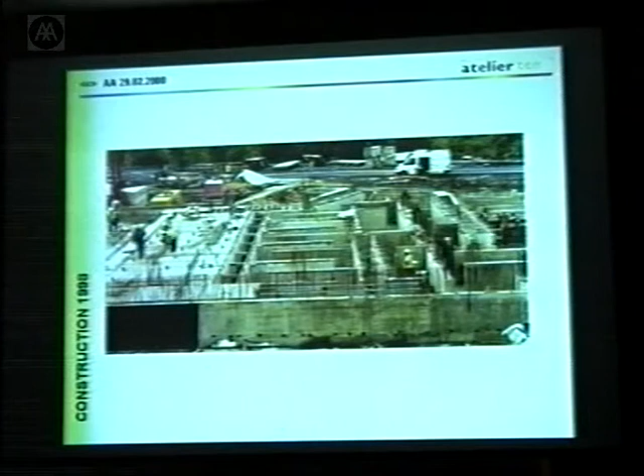Because all the people who were involved in the design and the creation of the Earth Centre became so embroiled in fundraising and trying to get matching funding going that they failed to deliver enough in the end, because all their creative energies were channeled down fundraising, which is very sad.

It's also one of those lottery projects, and I remember Max has had some of these, where you do what we call virtual stage D, because to achieve a lottery application, you do a design which has to be a RIBA stage D design, and you just don't get time to test it because you're not being paid fees. You're doing it on spec until the lottery approves the design, but you submit these great grand schemes which have to appear to be quite developed. And this is what happened on this project.

We did this design pretty much by intuition, put it in for the lottery application. And about a year and a bit later, we got the funding. We were on site building this raft. About 8 weeks later, Mowlem were on site building it. And we hadn't even modelled it because we hadn't had any fees to do all the modelling. So everything that we've done has been entirely on manual calculations and just some very basic modelling, because we'd literally been paid about £2,000 by that stage to develop the systems, which is complete madness, absolute complete madness.

It was a headlong rush. And thankfully we were then sponsored by EDAS to do some dynamic simulation work on it. But it is quite a difficult sensation when you arrive on a site and see this kind of building work going on, when you're thinking, hang on, I'm still just thermally modelling this to check that it works. Well, we knew deep in our heart of hearts that it did work, but we didn't know. In fact, the modelling showed that it works better than we thought.

And so what you've got here is a combination of concrete walls, which pick up the slabs from top to bottom, and blockwork walls. My biggest fear, being in Yorkshire, and the time of year the building was built, was that we found it very, very difficult to keep the water out. In fact, impossible, and the contractor in the end gave up, to the point where the labyrinth was about 2 feet underwater for about 6 months.

And I was very worried when we set the thing going that it was going to have terrific problems with condensation inside, with the hygroscopic action out of the concrete. But in fact, we ran it for about 3 months while they were fitting it out, and we haven't actually had any problems with condensation at all, which has been an enormous relief, and it's now extremely dry down there.

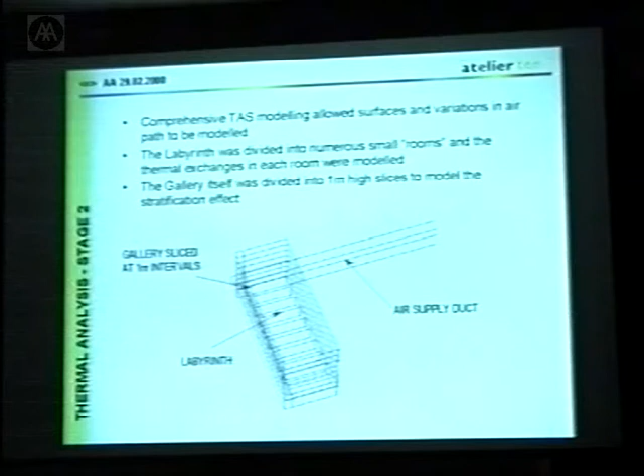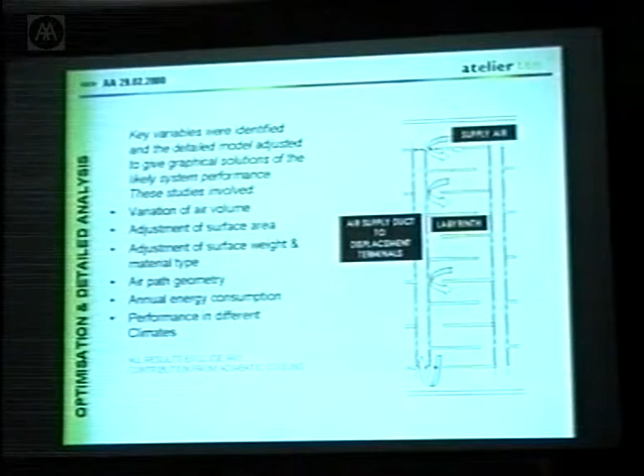So subsequent to the project actually starting almost on site, we did detailed TAS modelling, and I won't go into too much detail on this, but the important thing to realise is that they aren't simple things, although it looks quite simple. It's just concrete and block, isn't it? And you're blowing air through it, aren't you? So it doesn't look that complicated, but there are some fairly key variables that you have to deal with, which is the air volume, the surface area, adjustments of surface weight, types of materials, the geometry of the air paths, and then looking at how it might perform in other parts of the world.

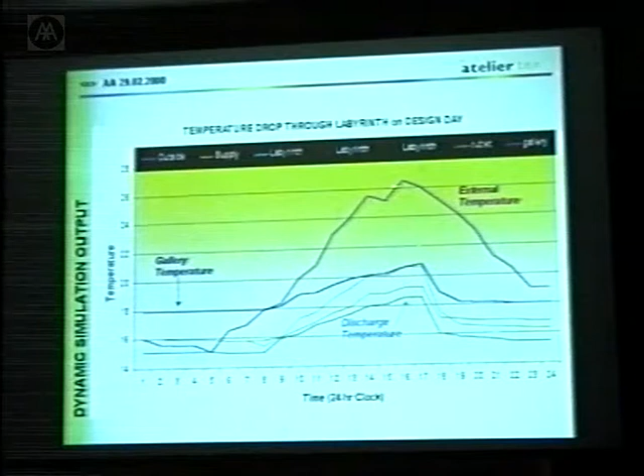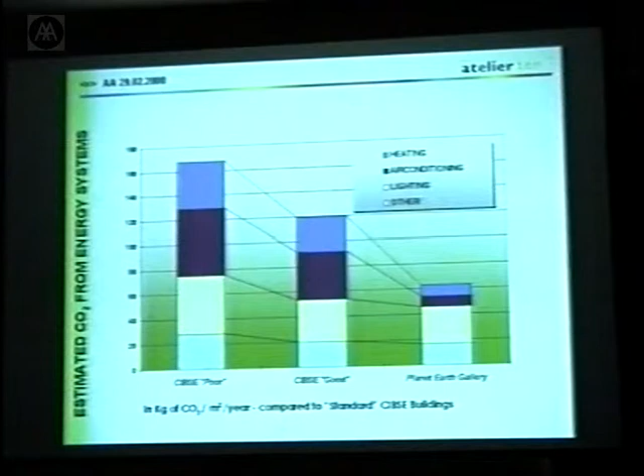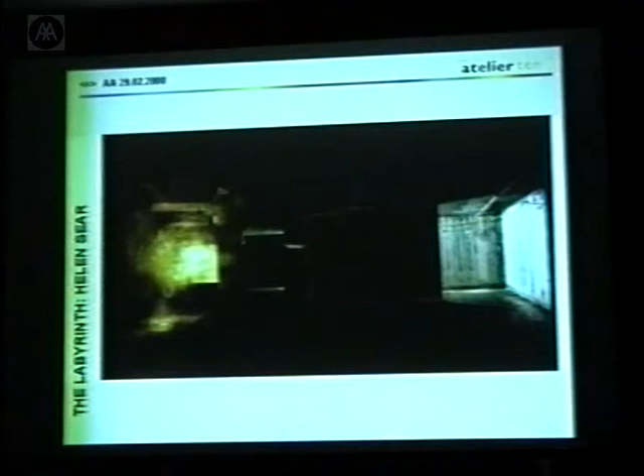One thing just to add to that is that thermally the labyrinth needed to be about 1 metre deep, but we had to have the dampers down there for control, which meant we had to be able to get maintenance men down there, which meant with CDM that we couldn't have a crawlway, we had to have a walkway. And then we had to put emergency lights down there. So the most frequent visitors down there are the guys changing the bulbs on the emergency lights. But for that reason, we had to elevate the floor slabs to 1.6 metres and actually increase it by an extra 400 to make it friendly to maintenance men, which is obviously an entirely laudable thing.

Okay. About the same time as this was going on, we were doing a competition in Melbourne, and this is just the last few slides. We did a competition for Federation Square in Melbourne with the famous Peter Davidson and Don Bates, who I think are reprobates who are well known around here in these parts.

When we won the competition, we didn't have a labyrinth in the competition at the time, but we ran the model from EDAS on Melbourne weather to see, if we moved the Earth Centre to Melbourne, what would happen. And what we found was, even with the much higher outdoor temperatures, if we added a bit of evaporative cooling in, we could maintain the labyrinth outputs at around 25 degrees, which we felt might have some good contributions to make to trimming the tops off this air conditioning load in Melbourne.

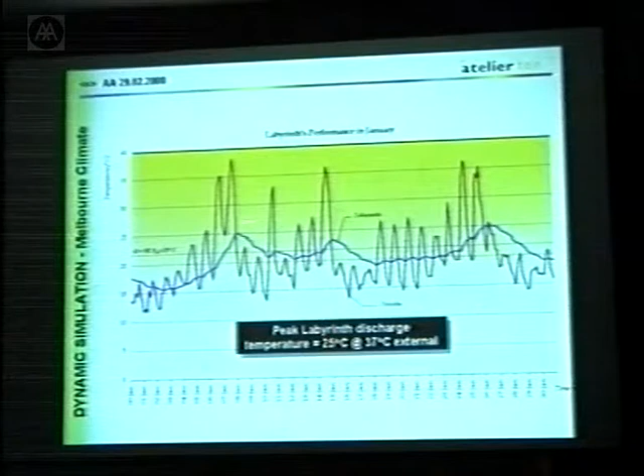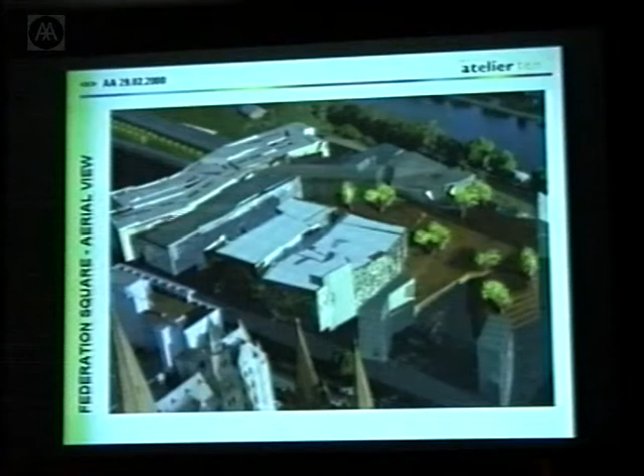And we actually handed over the engineering to a local firm for most of the buildings, but we kept involved in how we were going to deal with the main glass atrium spaces, because we were always pretty concerned about how we were going to environmentally control them, because energy is incredibly cheap in Australia. The Australian way is to air condition things from above, and what the hell. Their electricity is about 2p a kilowatt hour compared to about 6p here.

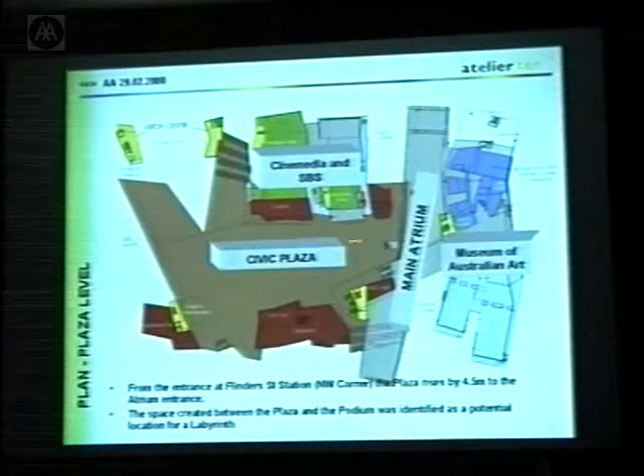And so this is, again, just to clarify where things are. It's the Civic Plaza, here, which rises up from the station by about 4.5 metres, then an amphitheatre space here, and then this main atrium that we're looking to condition with the other elements there.

And I took along my reports from the Earth Centre, and they loved the idea of a labyrinth. The client sort of fell in love with the idea and said, we really want one of these, because Sydney was supposed to have the Green Olympics, and they didn't, because they basically bottled out on all the funding. This is how the story goes. And Melbourne is very competitive with Sydney, and so Melbourne said, if Sydney aren't going to be green, we're going to be green. And so they took this on as a kind of iconic thing for the project.

And the project's gone quite a long way over budget. Surprise, surprise. And it has survived unbelievable culls. Everything else on the project has been hit really hard. But apparently the quantity surveyor starts every Monday morning meeting and says, right, now the labyrinth, and everyone just goes, shut up. Because they know he's not going to be allowed to take it out. And it has survived. It's now under construction, or it's nearly finished.

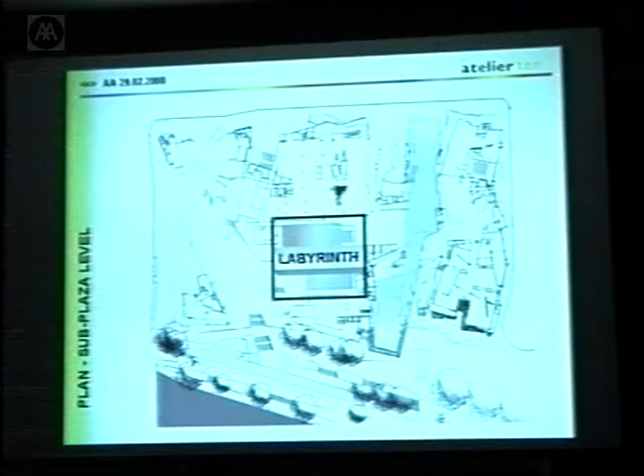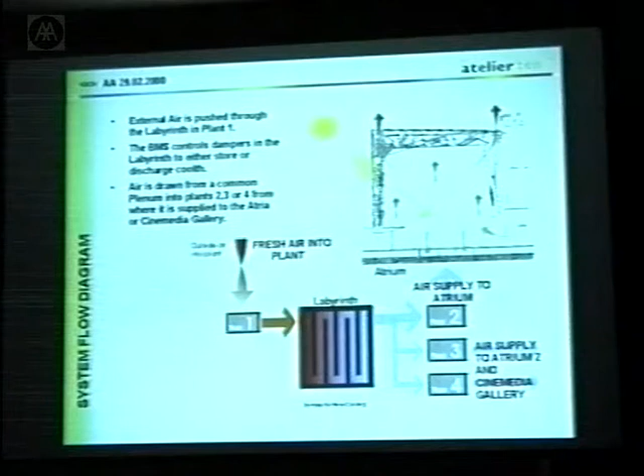And so the labyrinth sits here under the main plaza deck, and the main atrium is here. And the principle we've got is slightly different to the one at the Earth Centre, in that we have a plant that blows the air through the labyrinth and controls the conditions of the labyrinth. And then we have 3 other plants which are basically sucking the coolth or the heat out of the labyrinth. One goes to the atrium, but if the atrium doesn't need labyrinth power, the air can then be sent to other areas of the building where there are more year-round air conditioning loads, such as auditoria and theatre spaces. The labyrinth isn't ground coupled, which was a big issue for us at the beginning. We thought,